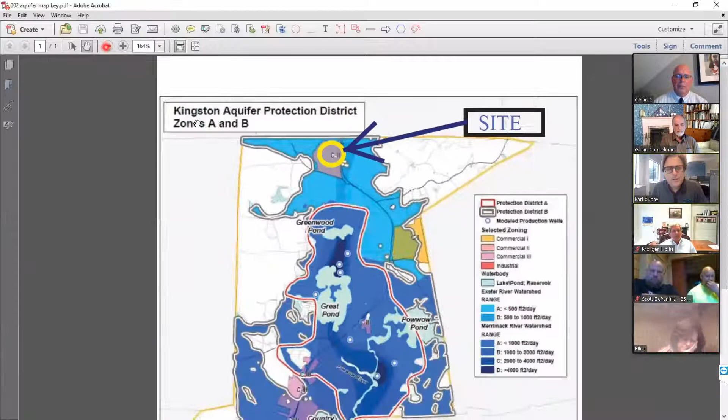And so I'm going to get out of this—we can always go back to that. There are some overlay districts, obviously, on the property. As you know, most of the town of Kingston is in an aquifer protection district. We're in the Zone B, Bravo zone of the aquifer protection district, and we fully recognize there's certain criteria we have to hold and perform on in the aquifer protection district, and our site is up in this area, right up in there. You can see that on the plan.

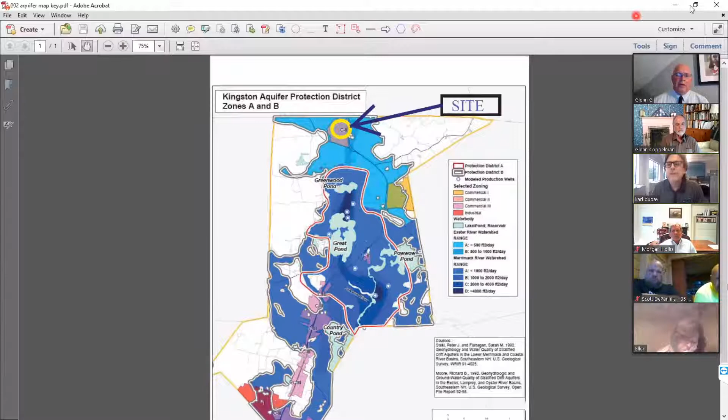So the existing property, we did a full survey on this. We've done a lot of mapping, a lot of soils, wetlands,

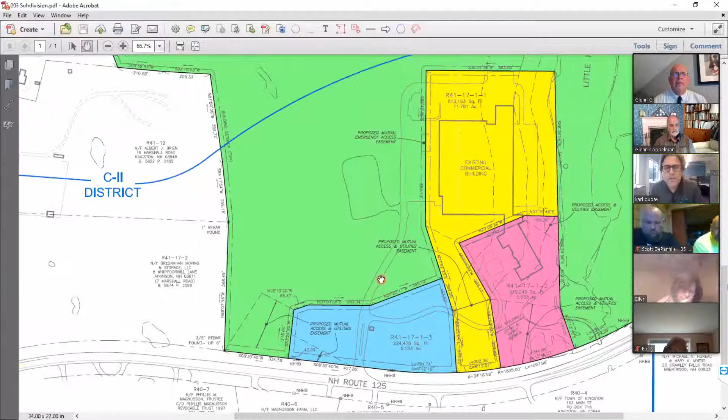And then the rest of the green lot, the remaining of this is about 90 acres, and that would be where the warehouse would be situated. So that's sort of the overview of where we are.

I'm going to zoom in a little bit, just give you a quick overview. So in terms of master planning, we would have a major access point here, and hopefully I can actually draw it.

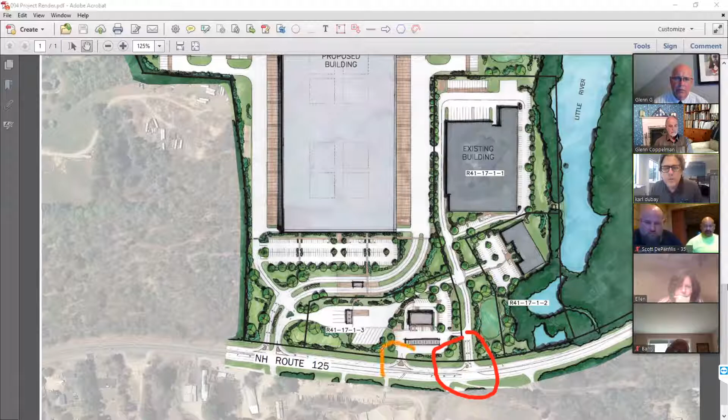There's also a minor access point, which we're looking at here, a right in, right out, and it might be just a right out—we're not sure yet. This is why we're having a hearing, to talk preliminary and non-binding, and get feedback from the public, from the board, and start that process, start working with town staff, engineer, etcetera.

We also have another access point here. The site off to the left, you see these woodlands right here. I think this is an aerial that's a few years old, but the Bresnahan self-storage site, which I know you guys are familiar with, is located off to the left side here, and then further down the street is the retail plaza that you guys have been working on.

So the existing building is an existing warehouse, and it's been around a long time. I'm trying to get the— so this building, you won't be able to see that.

This building here—what we're doing, since we're doing a comprehensive site plan, is improving the site on the existing building. We're improving the drainage, we're improving the septic on this facility, we're improving the access around the building because there's no access around the building currently. So we're doing all of that with a managed access plan.

So we peel off the two buildings here. There's a little connector in between that existing; we'll take that down, and we'll create this other lot here with the office building in this location that's existing. So both of these two buildings are existing.

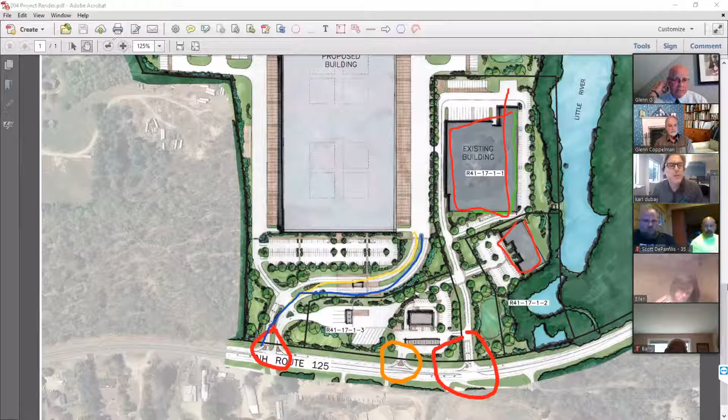I'm going to go to my mouse, zoom out. This building has full access.

Do you guys still hear that echo? Oh, guess not. Not now. Okay, thanks—it just went away.

We also have a planned access to Route 107 along the back, and we can talk about that as well. We realize that there are some pinch points in this area next to an abutter, and we need to address that—there's a regulation on the 20-foot setback at a minimum for this property here, and we believe that we can actually design this area to meet those criteria.

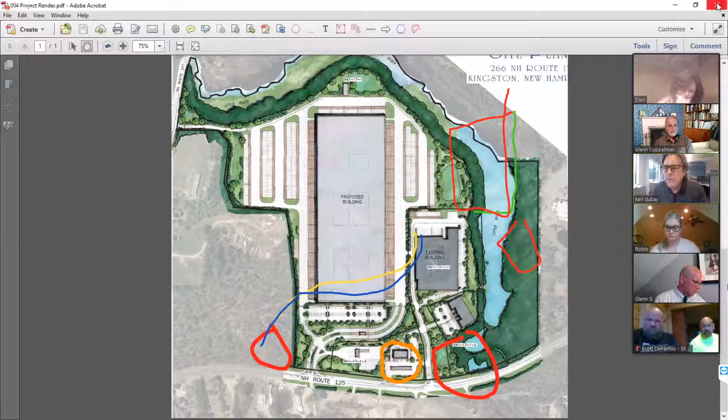We're also in the shoreland district, so let me dive right into some of the other overlay districts, if you don't mind.

Get rid of some of these scribbles.

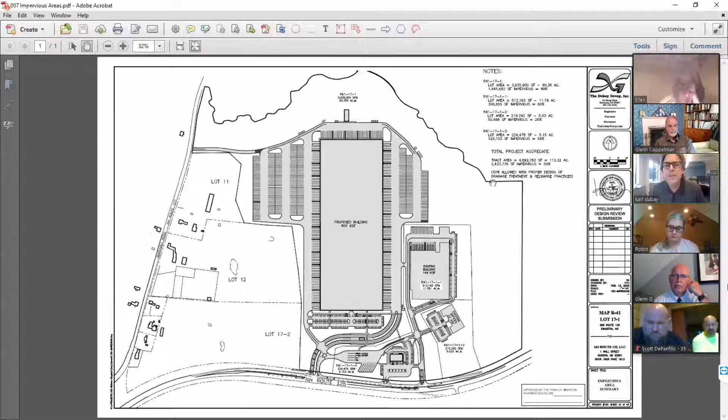So we submitted landscape plans and impervious area plans. Basically on the whole project, we're allowed up to 60% impervious area on each lot if we design proper drainage treatment and recharge practices into this project, and that's by zoning. Overall on average we're at 50% impervious, broken down per lot: one is at 60%, the others are 49, 26, and 56. So the aggregate over the whole thing is about 50%, meeting the impervious criteria.

We have shoreland areas, which we can get into in detail if you want. Any of this we can get into any amount of detail, but I just want to give an overview here.

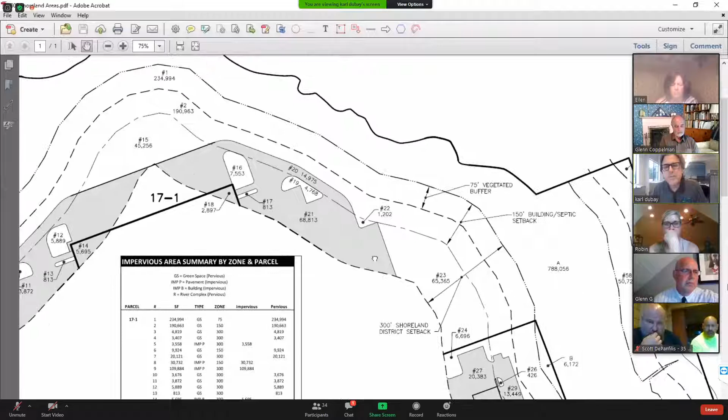The shoreland district, as you all know, is the local shoreland ordinance, basically a 300-foot setback. We conservatively called it off the edge of the wetlands associated with Little River, so that's a conservative 300-foot swath. We could actually go to mean high water or something similar, but we just flagged all the wetlands and took that swath. There's a 300-foot deep swath all around the back side of this property, all the way around to the right. Part of the existing buildings are existing non-conforming within that area, and we're showing those.

We've delineated all the little chunks and areas of the vegetated buffer setback, the 150-foot building and septic setback, as well as the 300-foot outer limits of the project. Each one of these areas means something, and we put that into a spreadsheet because we need to make sure the project meets the criteria for the ordinance.

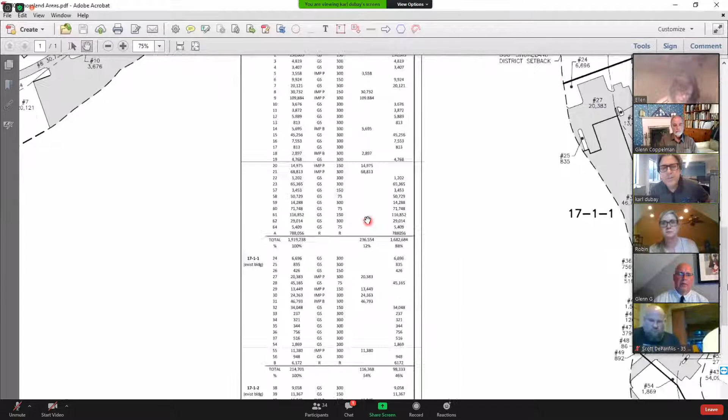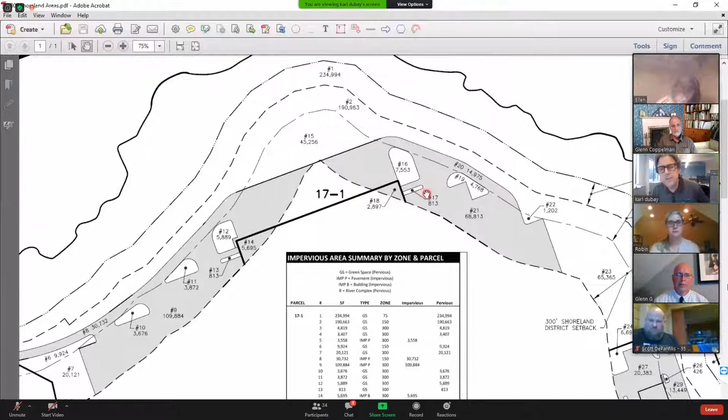Our intent at this very preliminary stage is to meet the shoreland ordinance. As we go forward in this design, moving things around, tweaking and adjusting, which I'm sure we would, all this data would be updated to ensure we're meeting the criteria for impervious area and all required setbacks. There are certain things the board could approve if we're doing a good job with the drainage, etc., for access around perimeter areas.

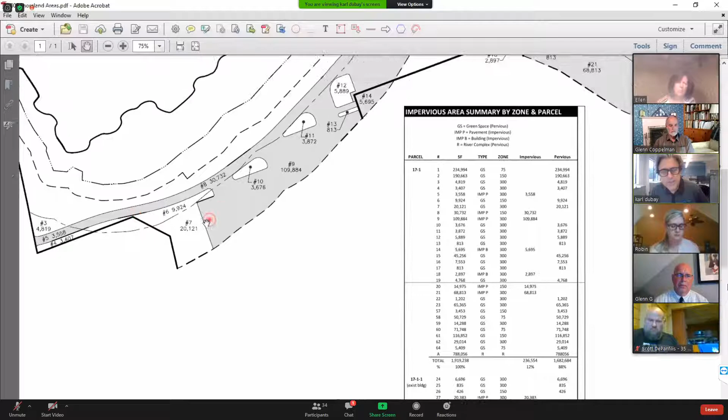So that's the intent of the shoreland ordinance. This property is not subject to the shoreland provisions of NHDES, although we are very familiar with those provisions. Your ordinance actually has a lot of those components embedded in it in terms of performance and function, and we would be honoring that, of course.

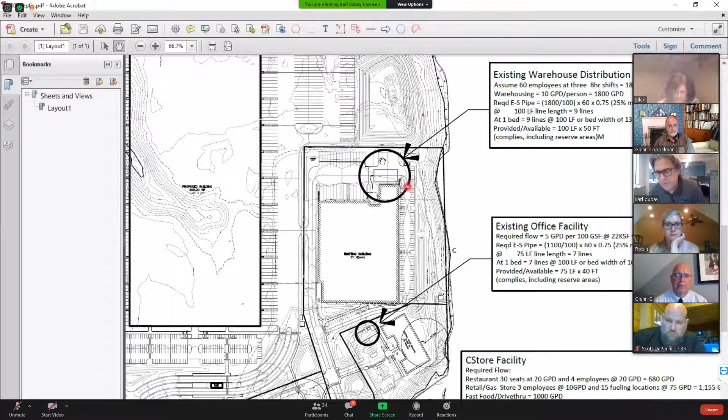We also have the septic load on this property. The required load for what we're proposing is actually very minimal. There's an existing septic system pre-approved by the state many years ago, about 3,700 gallons a day off the backside of this warehouse. We don't need all of that flow, and we'd be replacing and improving that system. We have preliminary calculations here for that system—it'll be less than about half of that, and that's more than enough.

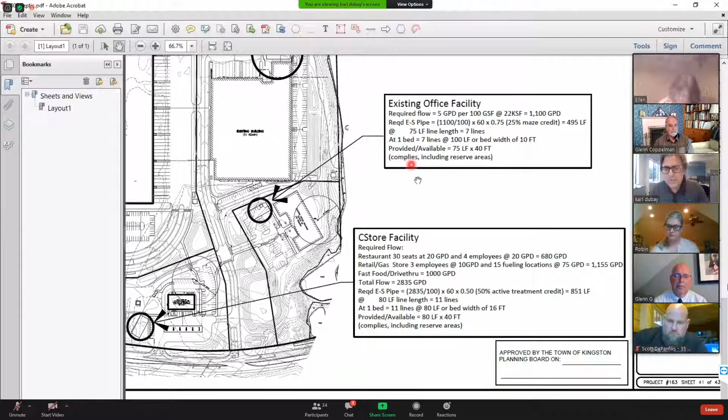We also have the office facility, which would get its own new septic system, about 1,100 gallons a day. This is all per state and town standards. There's a C-store facility with different components, and that septic would be out front here on its own slot as well—we have preliminary calculations for that, about 2,800 gallons per day. We also have the warehouse.

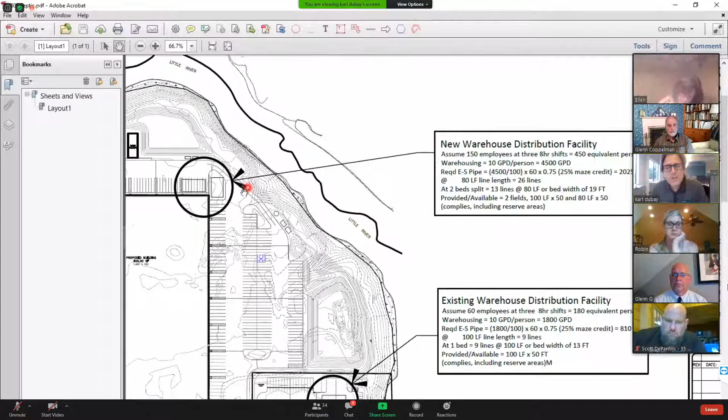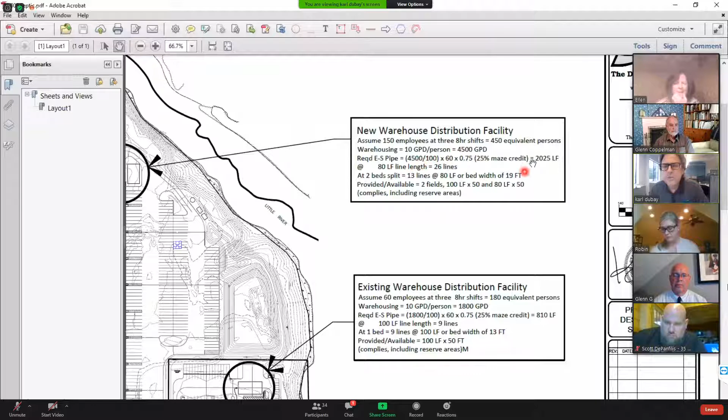If I'm going too fast or too slow, let me know, because I didn't want to drag this down. We have the warehouse with its new septic system, meeting all state and town criteria, assuming about 150 employees at the warehouse. We did a worst-case scenario at a 24-hour flow of three 8-hour shifts, which is 450 equivalent persons in a 24-hour period. At warehousing rates the state requires, it's about 4,500 gallons.

So we realized that two of these systems, even though relatively small, do invoke what the planning board could consider something requiring a full design, which we would do, but also a hydrologic study for those systems that are over 2,500 gallons, I believe.

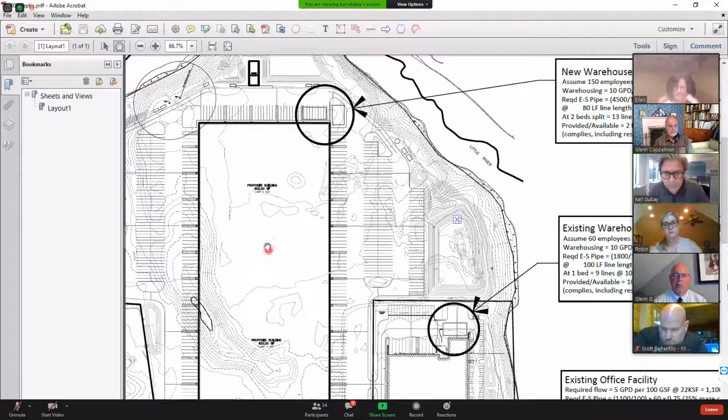And I think Andrea is on with us, so she could probably fill us in a little bit more on that. But we'd be happy to do those studies if the planning board needs us to. We have no problem doing that, and we know that we could perform on that.

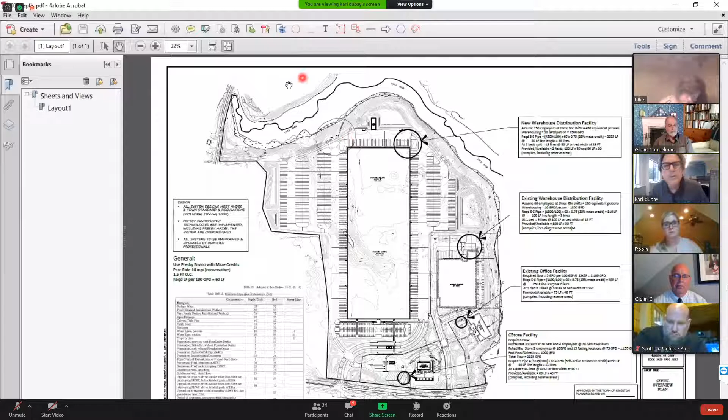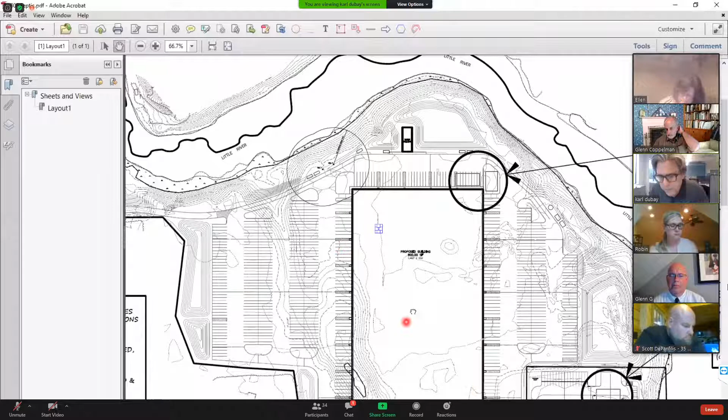In terms of water supply, we show a full water supply as appropriate per state standards for each of the uses. There would be a new one out back here, done to state standards, also NFPA standards and the expectations of the Kingston Fire Department. We would have a public water supply system here. We're not going to be taking water out of the river for that, obviously, and a facility out back for NFPA provisions. The water system would be looped around the entire property.

All right, cover a couple other items. We did provide full site plans. You'll probably see that we tried to do a thorough job, even though this is conceptual. We wanted to make sure we were doing our homework, and we still have a little bit more to do, obviously. We're going to be integrating your input, but the facilities, the layout, this is all industry standard items here. We're actually not at liberty to disclose the ultimate users of the property at this time, but that would be forthcoming. The site layouts, all the things you'd expect for circulation, geometry, widths, parking, islands, landscaping, all of that criteria is in here, and we probably over-designed a lot of this just to have placeholders for it.

We've over-designed actually quite a bit on the drainage, as a matter of fact, and Doug can get into that. We do have also full grading and utility plans at a preliminary basis, which basically shows the grading and the routing of certain stormwater practices and components. We have placeholders for a lot of treatment systems on this project, and Doug can get into that.

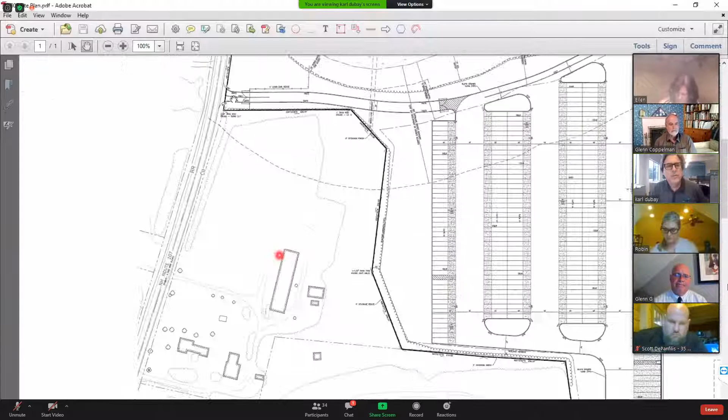So what I'd like to do is, am I going too fast?

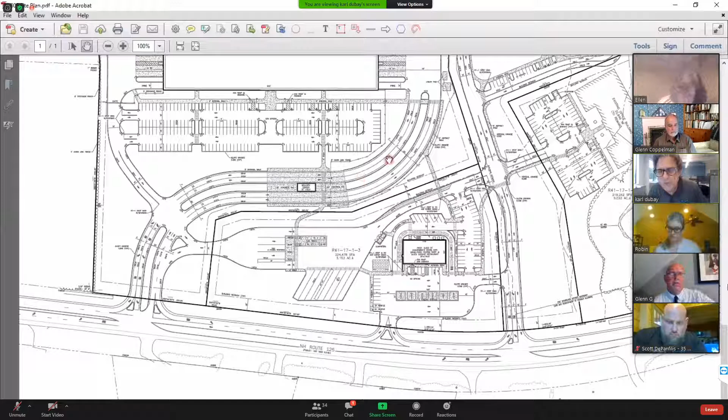Oh, you're good. Okay, what I'd like to do is hand it over to Doug. So what I'd like to do is have him talk about the corridor improvements we're looking at generically on Route 125. And I'd like him to actually touch upon some of the drainage and the treatment practices that we're doing on the project as well.

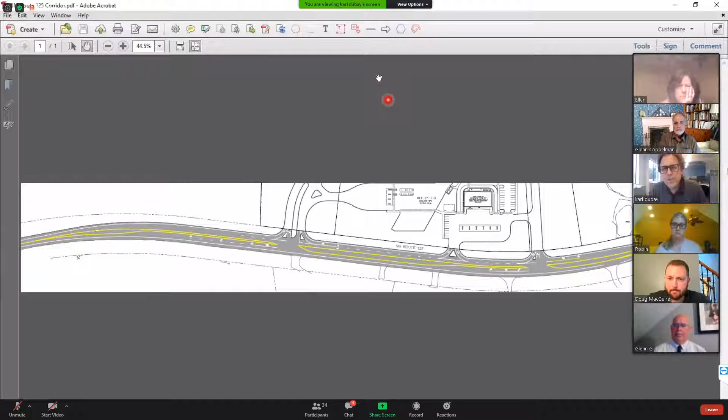So if that's okay, I'd like to open up a typical corridor improvement plan. And Doug, I don't know if you're unmuted yet. Let me find it. Doug, you're there? He's not unmuted yet. There we go. Yep, thank you, Karl. Now Doug, can you, do you want me to unshare, or can you jump on this? I'm not sure if you can or not with Glenn controlling, but if you need it, you can take this and start highlighting things. If not, I'll try to follow along with you. I'm not seeing the same prompts, Karl, to allow me to utilize this. So I think I'll let you just kind of walk them through as we go.

But basically what we looked at, at this conceptual level, was improvements that would be required for this type of development, incorporating the understanding of what we have for an existing roadway on 125. So obviously we have a higher speed roadway, so we made sure that we had appropriate left turn pocket tapers, so we have appropriate deceleration areas, where Karl's highlighting right there. And that's in addition to the queuing areas that we would have for the left turn pockets. So you can see we have a larger one for the truck entrance to accommodate the queuing of additional trucks, as highlighted. We have an ability for a truck to decelerate and then also wait in queuing. And then we have an exclusive left turn pocket for the use of the existing warehouse building.

And then also as part of this, we did exclusive right turn pockets, which would be on the right side of the road coming in on both entrances.

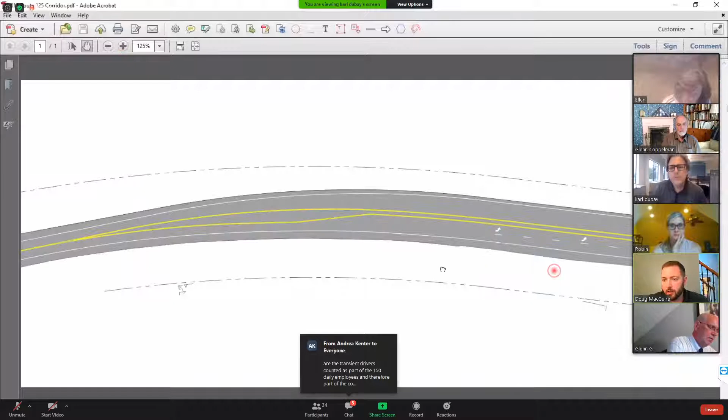Obviously these improvements could change slightly based on locking down exact users and exact traffic requirements, and also feedback from DOT. But we feel that's going to be something comparable to that level of improvement going through.

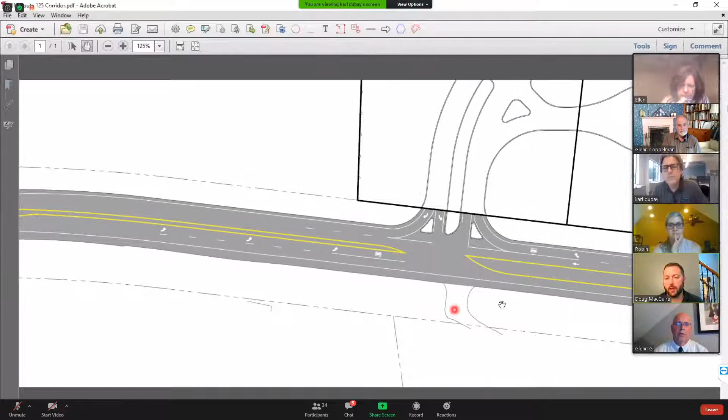So Doug, this is designed to be at speed, at those highway speeds, correct? Absolutely, yes. You typically wouldn't see that level of taper otherwise. You can see there are pockets to allow vehicles to move into the left turn lane out of the main travel lane, slow down, come to a stop, and wait for opposing vehicles to clear before making the turn into the site.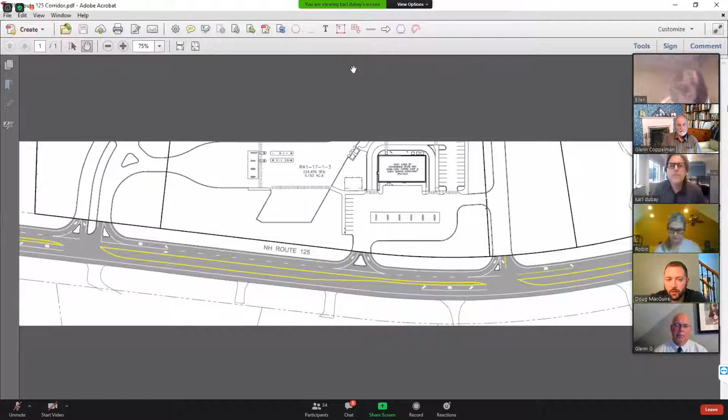Can you talk about what warrants are and how that works with these geometries, even a signal package? With final traffic design and analysis, this would all be coordinated directly with the DOT, and we've started preliminary discussions with them. Essentially, based on existing traffic flow on the main line, you look at the left turn warrant, which is the need for an exclusive left turn pocket. We're almost guaranteeing we'll need that, so we're showing it.

Same with the right turn warrant packaging—there's a need to determine whether you just do a taper into the site or whether you need a true exclusive lane for right turns. In this layout, we're assuming that as well.

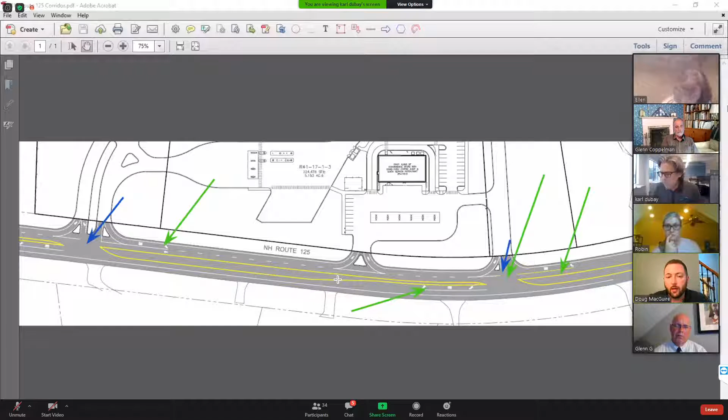There's also a third component, not currently shown, which is the signalization warrants—those are 4-hour, 8-hour, and peak hour warrants. Those would be reviewed based on actual traffic counts at the intersections, and if a traffic signal were warranted, that would be incorporated into our design work.

Okay, let's jump over to drainage, just to touch upon that. Let me find that mouse.

Wayne in our office plotted a composite grading and utility plan that we started with here. You can see this in a lot more detail on the plans that were actually submitted, and you can zoom in onto those online as well. I'll speak in a general overview sense, even though this plan shows a lot more detail, and then we can dive in a bit.

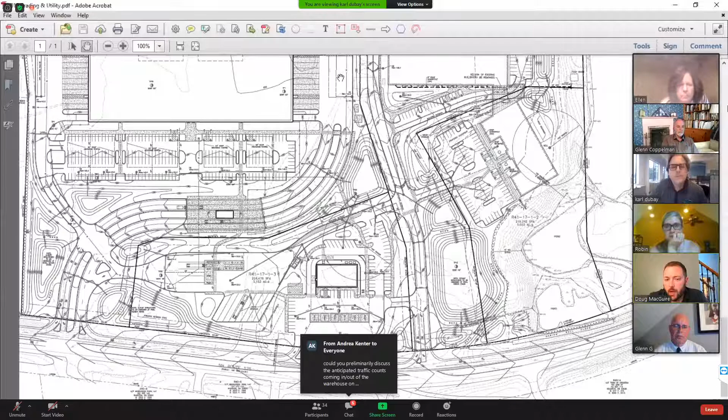On an improvement to a site of this magnitude, you're going to have a very strong consideration for drainage controls, because we're adding a significant amount of impervious area to a very large site. Fortunately, we have many areas incorporated in our design to address drainage improvements, both for treatment and for mitigation of peak runoff.

Luke Hurley, the wetland scientist and soil scientist, performed a number of test pits on this site to determine the type of soils we had and where the water table would potentially be, to rule in or out the potential types of improvements we can propose. Overall the site is very well drained—we have some nice sands and, unusual for New Hampshire, deep water tables, upwards of 6 to 7 feet in several areas.

So the goal for addressing drainage on a site like this would be to utilize the areas that have high separation to the water table, and also the natural large separation areas based on the topography.

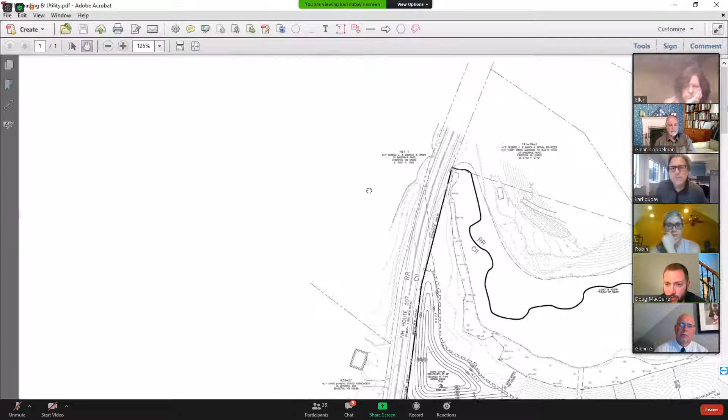So what we'll have, Karl, if you could pan over to your parking lot area where we have that natural ravine on the left side. So where his cursor is, we have a natural grade depression there, almost a natural low area. In those low areas, we're obviously not going to have the parking lot all at the same grade, so we'll be able to put in some very large diameter pipe, or what we've been using a lot, large oval or half-moon chamber systems that have a lot of capacity for promoting infiltration.

And in those areas that we can infiltrate, we will. We'll be able to lose a very significant amount of the proposed large square footage of the roof into those areas. The nice part is that roof water isn't getting the same type of environmental impacts as maybe the parking lot would be, so you're getting naturally cleaner water that we can promote and infiltrate to offset that large roof area.

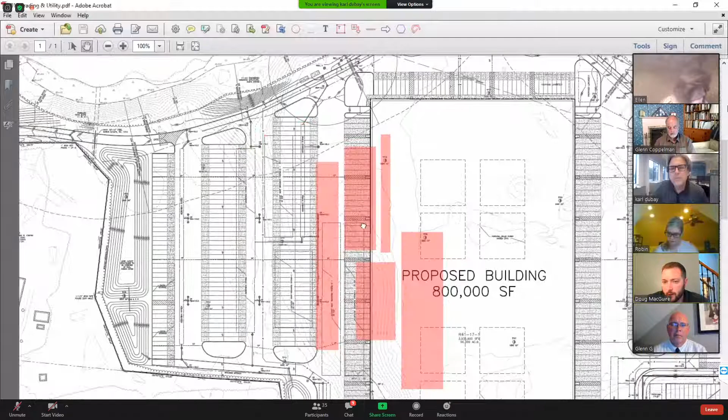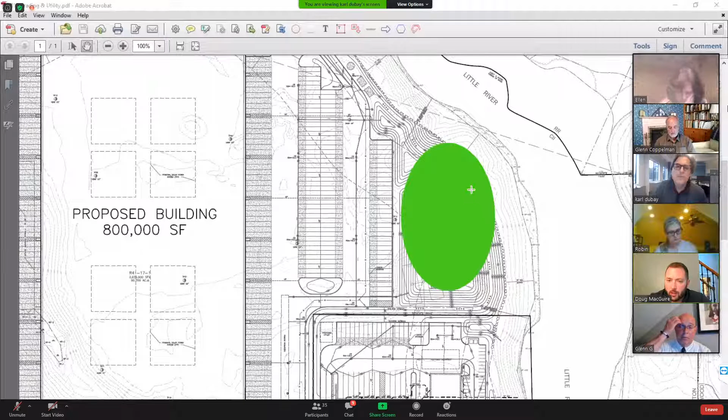And then in areas where we may not have the separation we want to meet treatment criteria for an infiltration practice, we have very, very large ponds that we're proposing. These are open ponds. Open ponds are the best option for a site of this size because you get the best bang for your buck on capacity. One that Karl just highlighted there is a very large capacity pond.

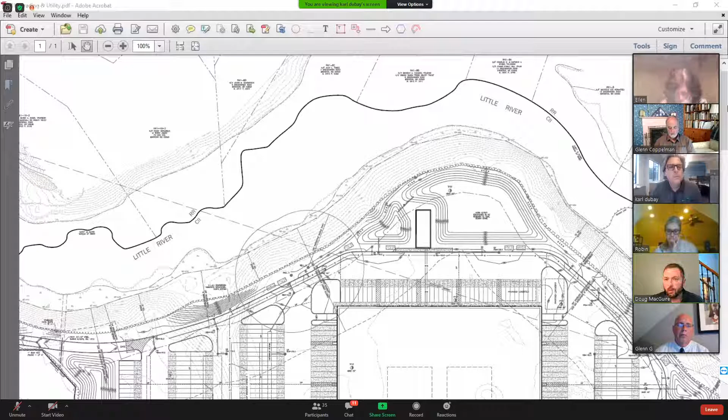What we'll likely do is use some of the standard AOT accepted drainage practices for these areas. The nice part is we can work with the natural grades and natural elevations of water tables in what we propose. So some of these areas we may design as a potential wet pond, which provides treatment through dilution, with a permanent pool held in these systems. We may also utilize surface sand filters as a filtration practice. All of these practices would do an appropriate job of mitigating peak runoff as well as treatment of the stormwater.

Now, where Karl is right now, we talked a little bit about the C-store and gas station. That area would be handled differently from the rest of the site. It would be considered a high load use due to the sale of petroleum products and the potential for petroleum to be on the surface of the drainage area, which could be collected. For that reason, we have very specific types of designed ponds which we utilize for treatment, and there would be no infiltration proposed in those areas.

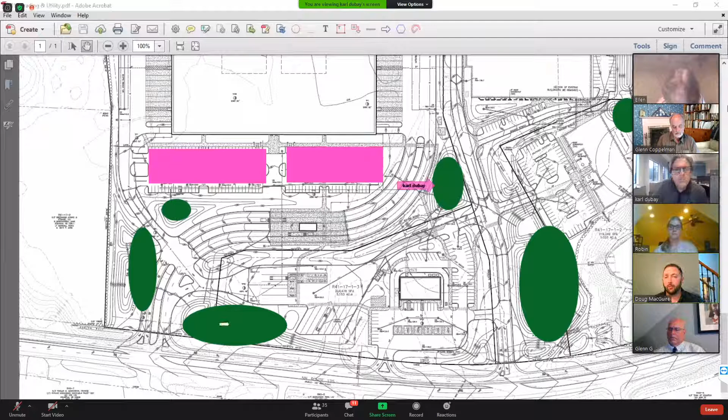AOT, the Alteration of Terrain Bureau at DES, actually prohibits you from utilizing any infiltration practices with a high load area, and we would obviously abide by those requirements. So in this design, we're accounting for the fact that we would not be infiltrating within the C-store area, and those areas would be handled separately and differently from the remaining areas of the site.

I know that's a lot to throw at you guys all at once, but the general overview here is that we are going to be able to accommodate infiltration, which is key to a site of this magnitude. If you have really terrible soils where you can't get any infiltration, it's very difficult to store the amount of water that a site like this would potentially produce during these record storms that we're designing for, which would be all the way up to and including potentially the 100-year storm.

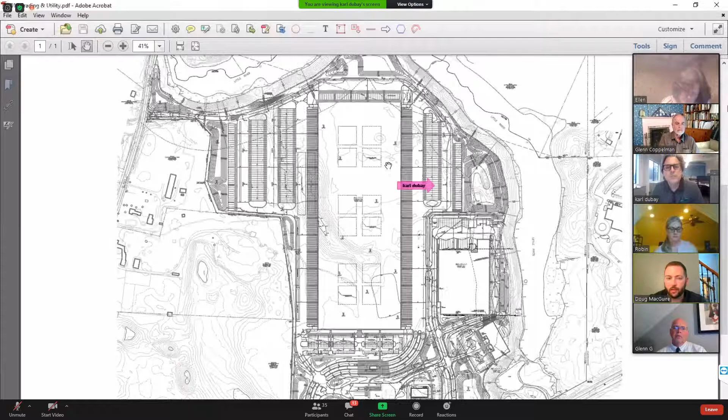So the fact that we have good soils on site and good separation to water table is a very good sign in allowing us to be able to recharge water. And where we don't, we do have large capacity areas that we're dedicating to drainage to be able to have that storage that we need for a site of this size.

And Doug, can you talk a little bit about AOT criteria, any special criteria? We also have an aquifer protection overlay here in town.

So we would be meeting that criteria, the separation. Can you talk a little bit about also the practices, different treatment, pre-treatment, treatment train practices that you would be anticipating on this design? Yeah, absolutely.

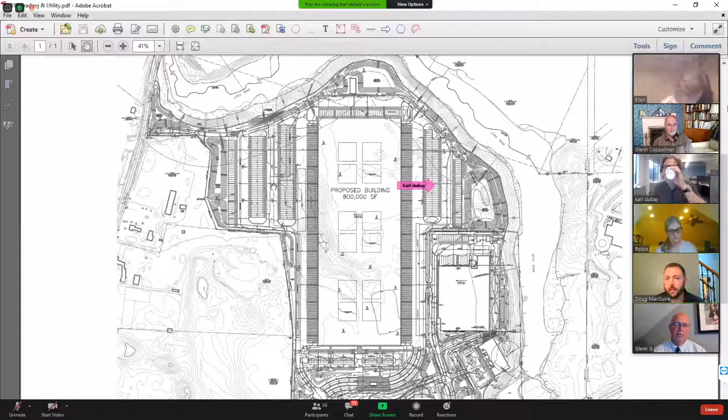So more specifically, when I say treatment, there are a few different levels. What the state requires and what we would be implementing on a site like this would be first that first flush pre-treatment level, which can be handled in a sediment forebay, or potentially multiple types of pre-treatment practices to treat areas of particular concern, like large truck circulation areas or storage. What we can do is provide a number of items, and that's kind of what we're proposing in our design.

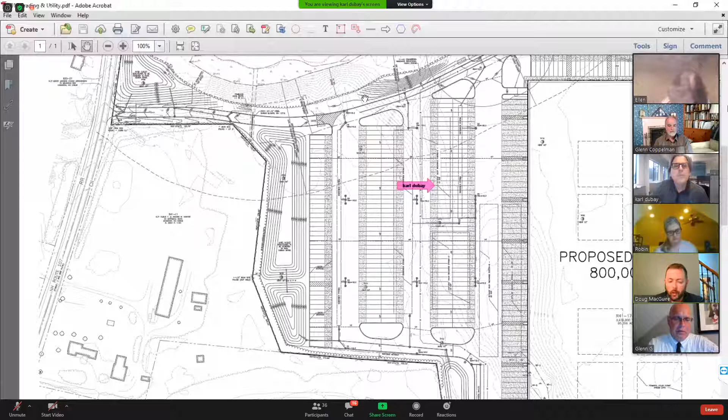So the first line of defense would be offline catch basins with deep sumps. What that will allow for is including what they call an enviro hood within the catch basins themselves. So that's an oil water separator and a grease trap built right into the catch basin. If you get small spills or debris, trash, all of that is collected right at the catch basin.

Then what you can do as a belt and suspenders opportunity is put in some form of a water quality unit, which is a more in-depth oil water separator and sediment reducer, because it allows the water to flow through a device, letting suspended solids fall out and hydrocarbons or petroleums float and be collected within the system.

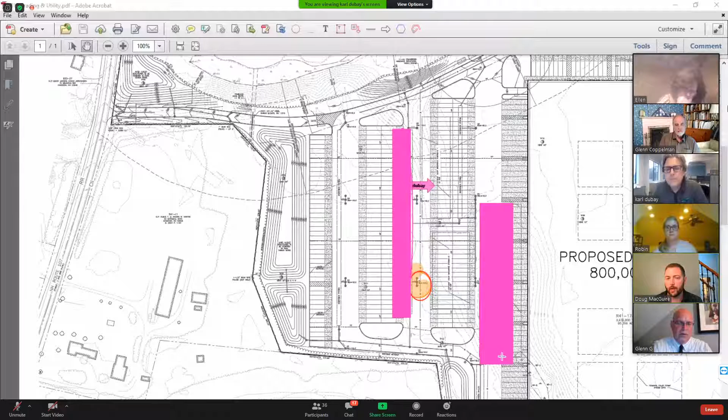From there, we're going into the infiltration practice itself. If we're using infiltration, we're making sure we have at least 3 feet of separation to the water table, so we're not introducing that water directly into it. We're allowing it to go through the natural soils, which acts as a filtration practice as it gets naturally infiltrated into the soil. That's a really good process, so we're trying to maximize that as much as possible on this site.

Now, is that 4 feet in some areas? So with AOT, they do look at the presence of certain groundwater protection areas. In review of this site, it was not categorized in any groundwater overlay zone, though I understand it is in the aquifer protection zone, as much of the town is.

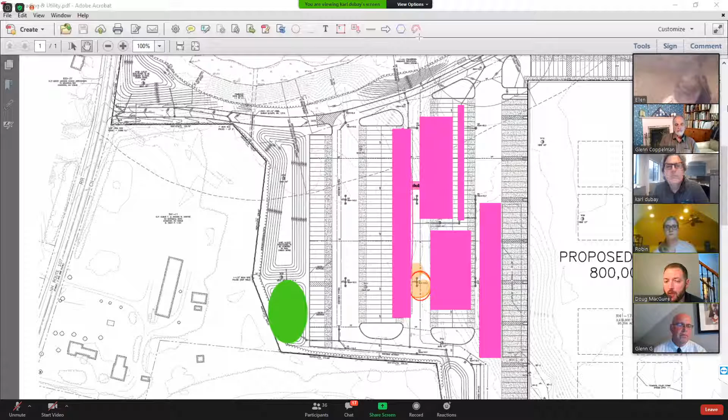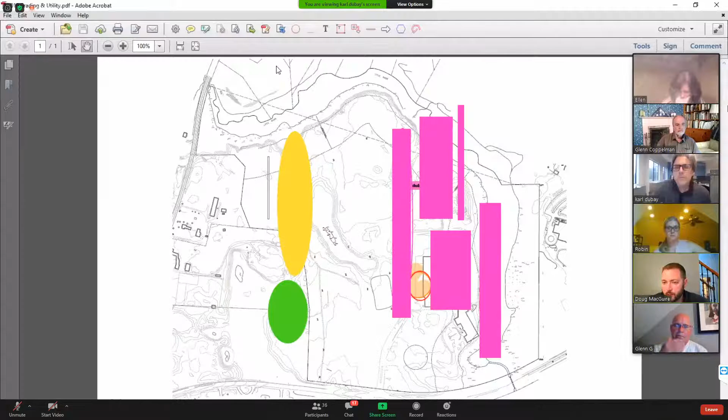There were some existing wells, one of which is on our site, which are considered community water supplies. Anytime you have a community water supply on site, that kicks in additional provisions, extending the requirement from the typical 3 feet separation to water table up to 4 feet of separation.

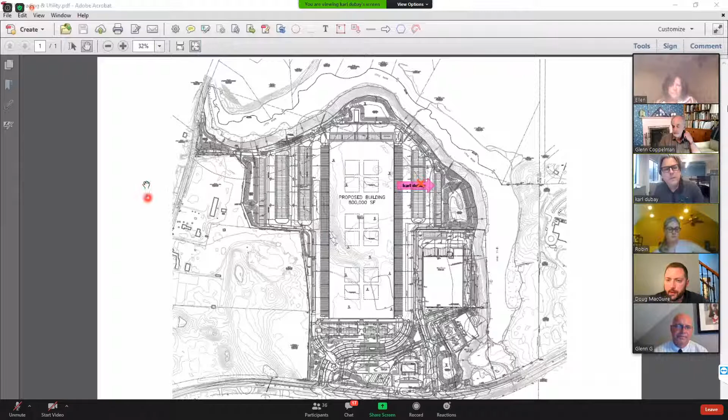On this site, I'd say about half the site is encumbered by some of these well radii. We have the existing courthouse, which is technically a community water supply, and also an existing 55-plus development, Kings Landing, over here. So we have those two properties with large radii extending onto our property, which would kick in these extra drainage provisions. We were aware of those, and we would be designing to accommodate them.

Okay, thank you. I'd like to wrap it up so the board can start in with us. But I'd just like to point out a couple items. In our submittal, on sheets 2 and 3, we have zoning compliance items — we're not going to go through all of these, obviously.

We took the ordinance section by section and subsection and tried to outline what was applicable and how we met that criteria, even on just an overview standpoint for the preliminary non-binding application. There's a whole sheet of compliance notes, as well as the next sheet, which covers site plan regulation notes, subdivision regulations, fire protection regulations, and septic regulations. Our intent is positive and to try to be thorough.

I realize out of 300 pages of regulations and overlays and everything, there's probably going to be some hot spots on a project of this complexity. We look forward to working with the board, staff, their consultants, and the abutters in going through all of these regulations. Our intent is to be by right; if we need some waivers, we would have to explain those, though there might be a few items interspersed depending on how they're interpreted. Our intent is genuine and positive — we just want to provide good tax base. The master plan talks about the C2 district and talks about the uses.

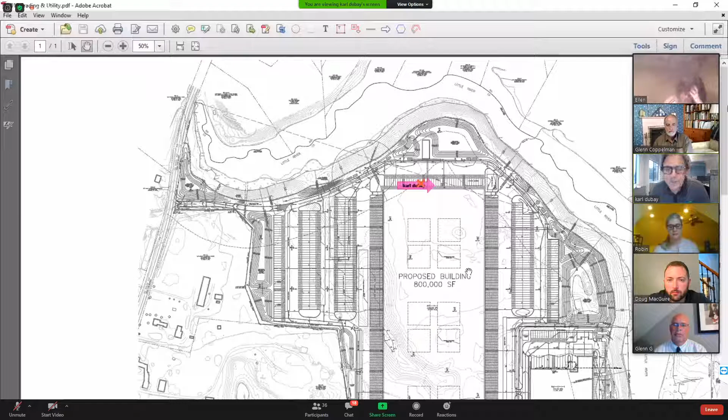So we wanted to demonstrate to the board that we could indeed create a site lighting plan that met your lighting ordinance, so we wouldn't have to go get a variance, even though we have 0-foot candles where we're supposed to have them. But that's just something we thought was important, and someone would be looking at that.

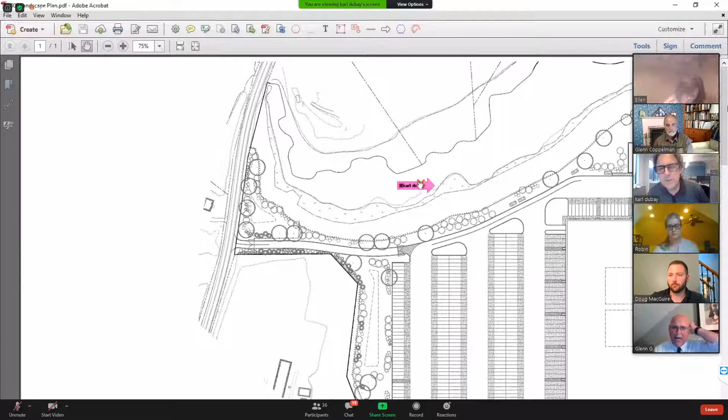On our landscape plans, even on a preliminary basis, our intent wasn't to show every little square foot and every shrub and tree count, but to provide the necessary required landscape per your regulations. We're going to be working with the abutters and the town on landscaping and those elements, and I know that's going to come up.

We have a heavily landscaped site in the front here. Obviously we don't have to go into every little component of that, but our intent is to make something we can be proud of in Kingston on this project.

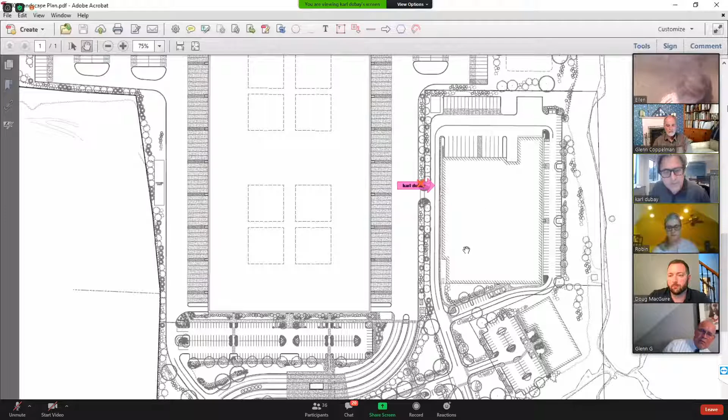The other item is impact fees. There's no impact to the school system, obviously, but there's about a 50 to 54 cent impact fee for the fire department per square foot. Just this building alone would be about $420,000 in impact fees. In the master plan, it talks about optimizing the tax base. We believe we are doing that, and we believe we'll deliver this in the C2 district while still making sure our design meets the criteria for performance, especially drainage and treatment performance.

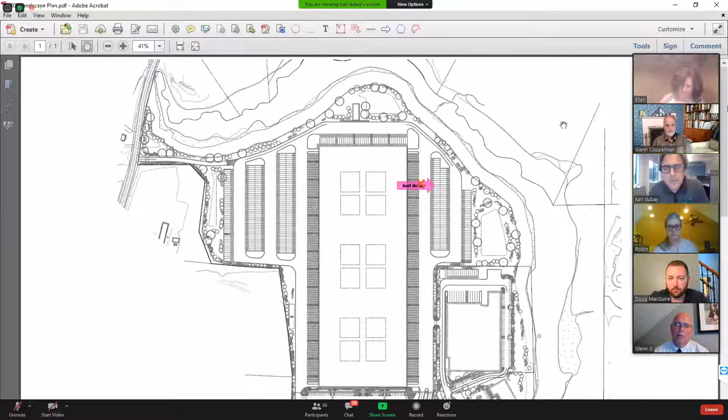So I think that's about it. We had some other sheets here, and obviously you saw some other plans. So I think I'm just going to leave it with this plan here.

We're just looking forward to meeting with the board. We did reach out to a few abutters. We did not have success in their responses, but that's okay, we understand it's life. We just want to let everyone know that we have an open door policy on this. We want to do a good job, we will do a good job, and it's a good start. We'd like to move forward on it pretty quickly.

We submitted this back, I think, the day before Valentine's Day. And we've all been through a lot, every single one of us, with this virus situation. Now it's here, we're almost at July 4th, and we're just now getting together. We're happy about that, and we'd like to continue with that.

Okay, Karl and Doug, thank you very much for the overview. I suspect that as we go through some of the questions, you might want to bring up a specific sheet to use as an example or to point something out, but we'll see how that goes as we go through the discussion.

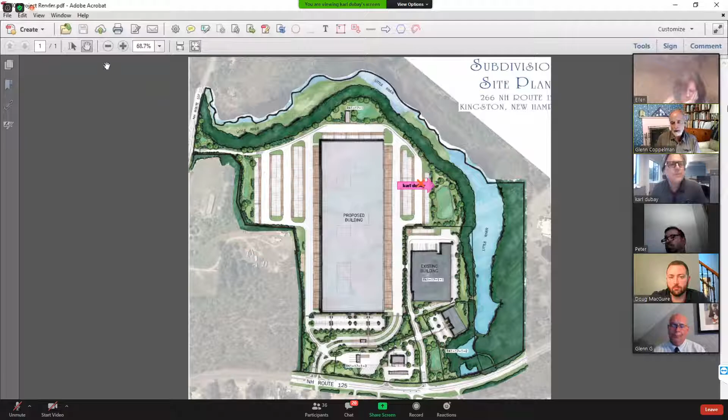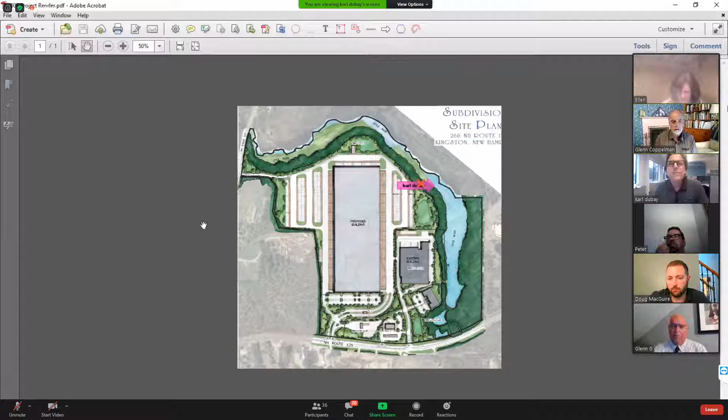Just a quick note, Glenn and I have been watching the comments as they're coming in. There are actually quite a few from the public, so we will go through those, but I want to give the board and our planner and our town engineer a chance to ask questions or make comments. And then we do have 2 town department comments that I could do right now. They're pretty quick, and keeping in mind that it's design review, these comments are based on what they've seen.

So from the health department, there's a comment regarding how you did the calculation on gallons per day for the septic on the food service part of the site. He notes that if paper is going to be used for service, you can use 20 gallons per day, but if it's not paper, it's got to be 40 gallons per day based on the state requirements.

So that's just something to be careful of that he wanted to note.

The fire department provided a comment sheet with four quick comments. These are just alerts to you as you're going through this, that you'll need to comply with NFPA codes, obviously comply with town ordinances, and the fire department would require Knox boxes for emergency access, which I'm sure you're used to dealing with.

The fire department would also want to utilize third-party review on behalf of the town for all life safety issues, and the town's entity to do that is SFC Corporation. Yes, we're familiar with their fire department, actually their fire protection engineers over there, and they're very good, and we work very well with them.